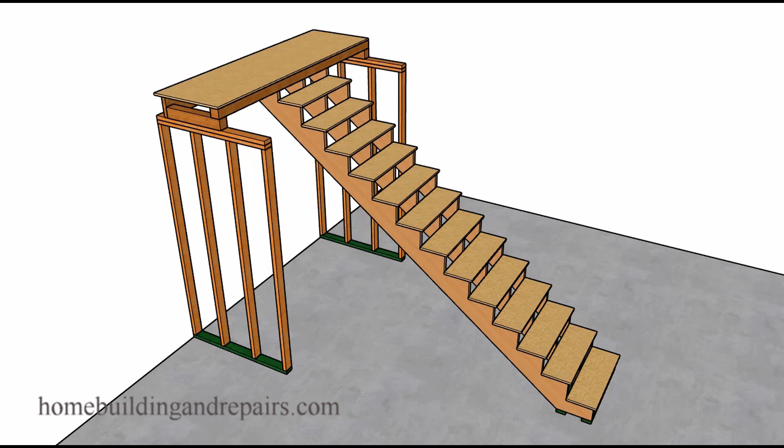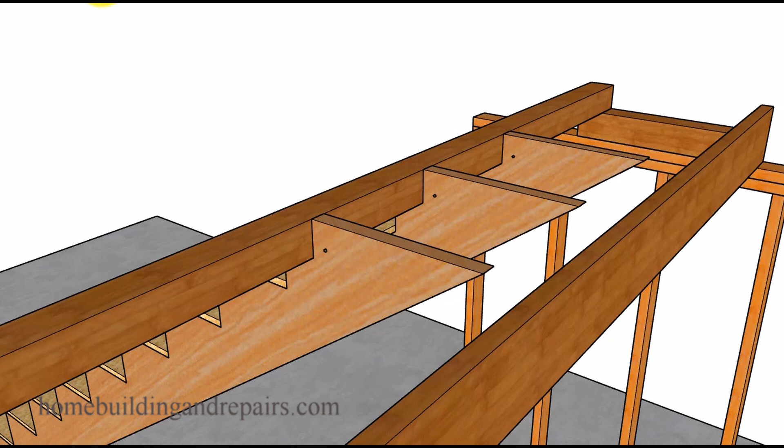In this video, I will provide you with a couple of ideas on how you can create a better connection for your stair stringers if you have a situation like this, and how you can make a repair if you have a situation like this and the stair stringers have cracked or separated from the 4x4, and it's usually not

going to be uncommon. If you drive a nail in on each side like this, if you toenail into the stringer at about the same point on both sides, it's not going to be difficult to imagine this section of the stair stringer chipping off, especially if the grain of the wood is going in this direction. And for those of you who might not understand what I'm talking about, it would be something like this.

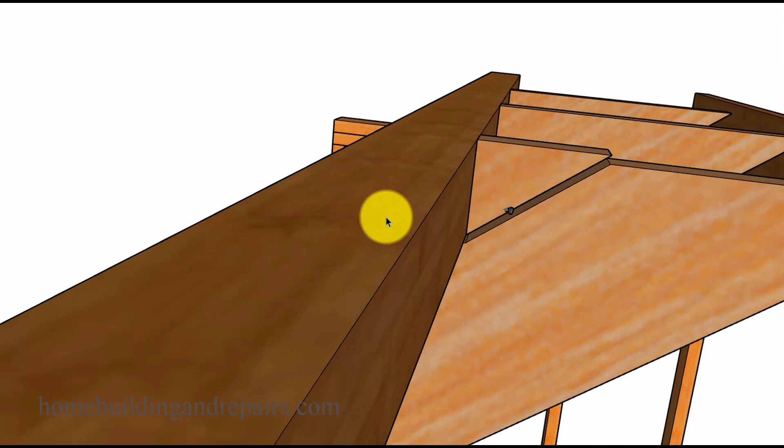And of course, if this is the only connection point for the stair stringer to the 4x4, then the stringer would settle down or move down a little bit and separate from the bottom of the 4x4. And of course, this could create an extremely dangerous stairway to walk up and down, because this section of the stairway would be moving, and as it moves, it could put pressure on this stair stringer.

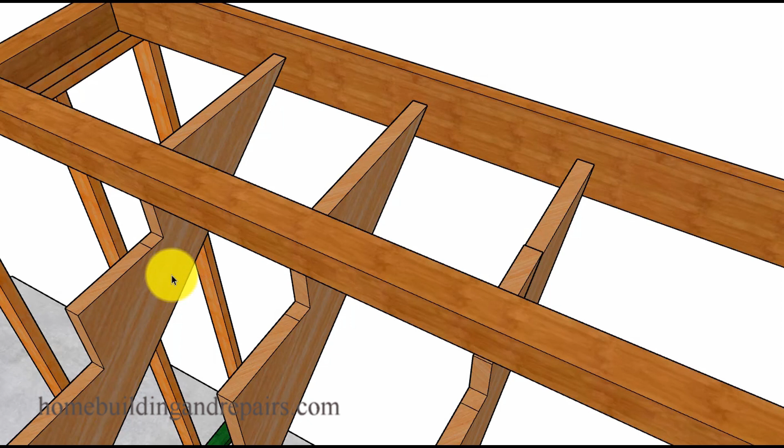And if for whatever reason this one separated, then you would only have one stair stringer holding everything up. And if that one actually separated, then the entire stairway would collapse. So how do we fix something like this? You can do it simply by adding a couple of blocks like this to the floor framing and using a variety of different types of building hardware, screws or nails to add additional structural reinforcement.

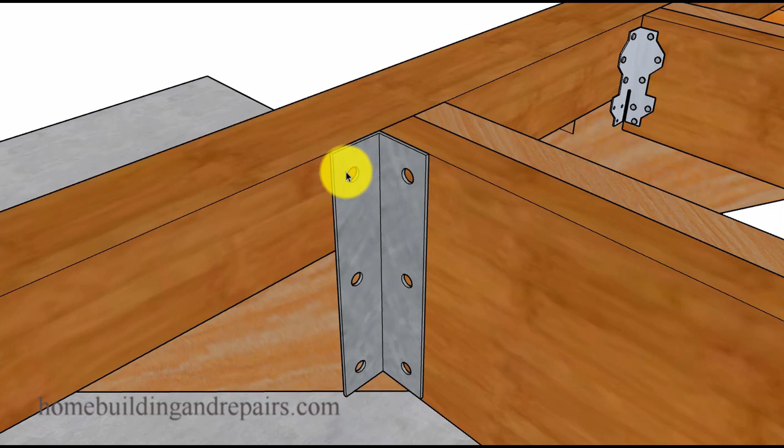And I'm kind of just throwing out a couple of different ideas. You could always use some type of framing hardware like this bracket to where you might be able to install a lag screw or maybe even a carriage bolt in here, and then install some lag screws or carriage bolts or regular bolts with nuts and washers that would run all the way through and connect the stair stringer to the block. However, I just wouldn't recommend installing too many bolts into a 4x4 like this one, because that could structurally weaken that particular piece of lumber.

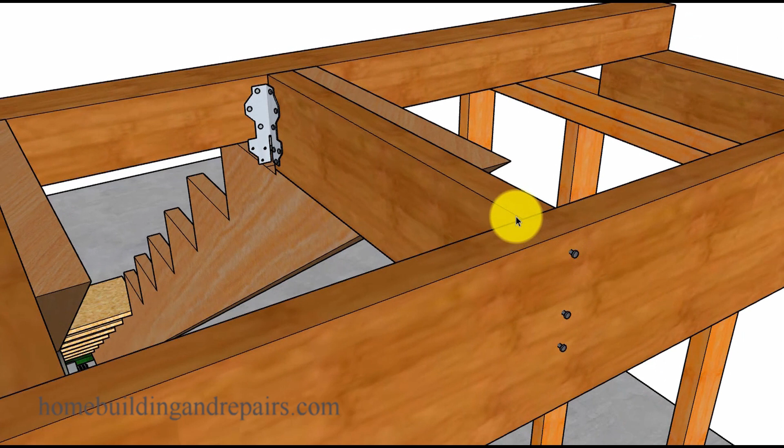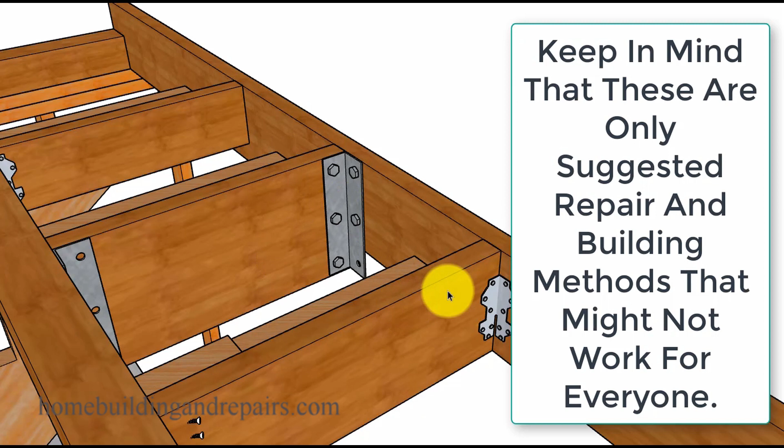And another idea would be to use a smaller piece of lumber and maybe another framing anchor. And if you could access the other side, you could always end nail into the block without using any framing hardware. Or you could use some nuts and bolts on this side, again with a larger block and a few more bolts. And in case you haven't noticed, I have 3 different boards here: a larger one, a medium-sized one, and a smaller one. And since I'm not a structural engineer, I will let you choose which ones you're going to use and how many framing anchors or nails you're going to put into this thing.

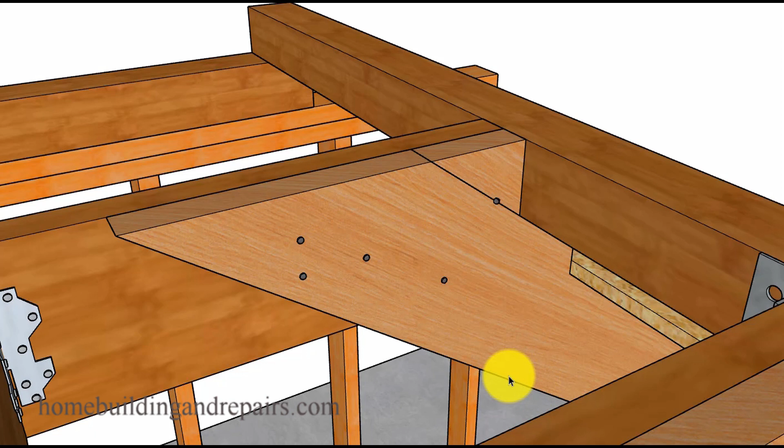Next up, you can raise the stringer back to its original position, and that can usually be done by simply lifting it into place, having someone else help you, or by using some type of a brace. And if you couldn't lift it up that way, you could always use a jack with some type of a post sitting on top of the jack and underneath the stringer. And I will leave that up to you on which method you choose to raise the stringer back into its original position, so that you can fasten it to the block with either some nails, screws, or even by drilling a hole and installing a bolt with a nut and a washer on it.

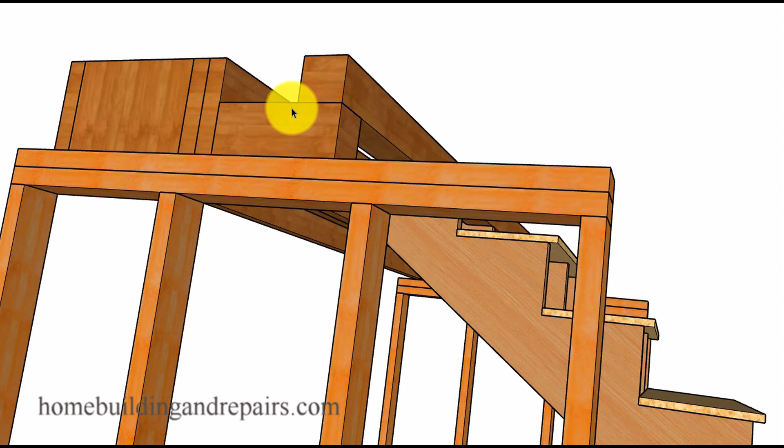And keep in mind that this might not be strong enough. And if you're looking for something a little stronger, then you might need to install another floor joist. And in this case, we're installing a double 2x joist, and then we're going to be cutting the stringers so that they can attach to the double joist and provide us with a better structural connection. And that brings us to the end of the video, and hopefully you learned something.